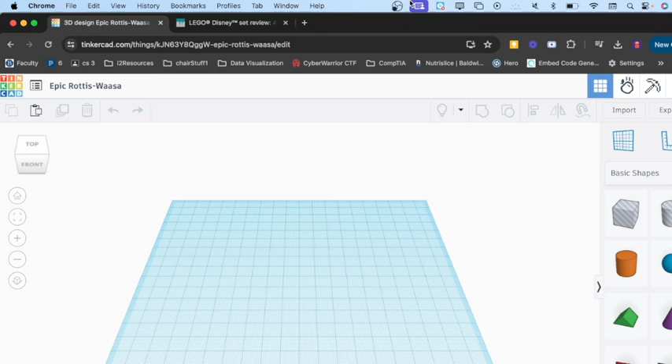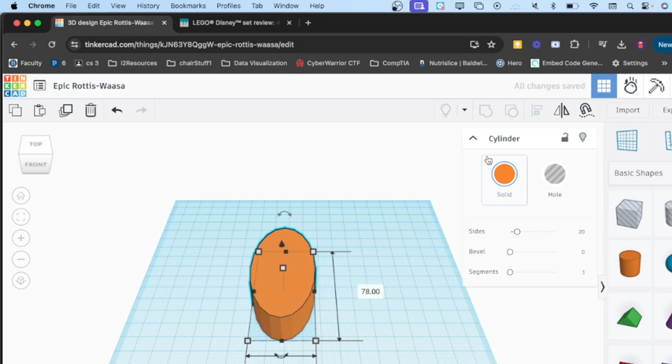I think the first thing we got to think about is the brush head. When I think of a brush, it's kind of like this shape. So we're going to start with something like this. We're going to scale it to be whatever - this is the thickness of the brush.

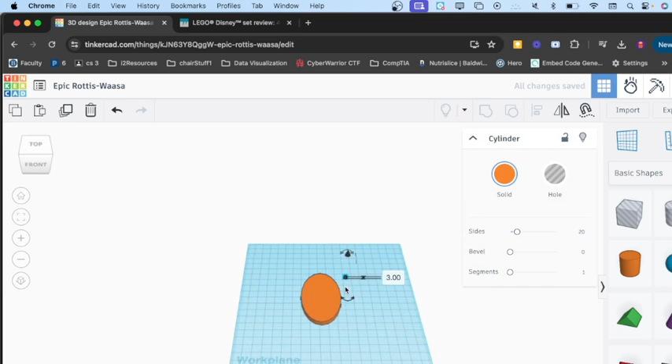And then we need to make some bristles. Now, the thing about the bristles, what I've learned, is that we're going to have to make them at least about 2 by 2 mil. You can see my settings are in millimeters down here. That's because if you go much smaller than that, even though real bristles are smaller, the printer has a tough time printing them. So we're going to make them like 15 - that's a centimeter and a half.

And we're going to move them onto this, which I think we made - what did we make it? 5. So we need this about 5 above. So right there it's at 0, and now we're at 5.

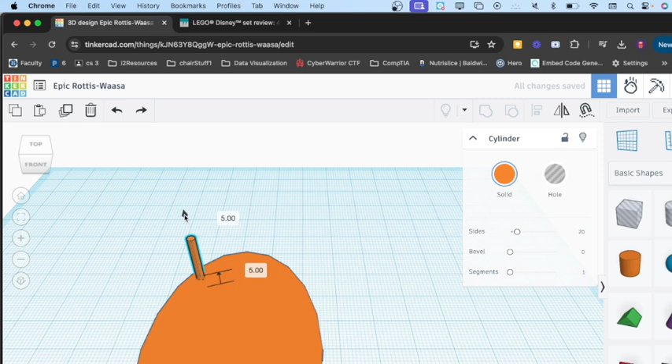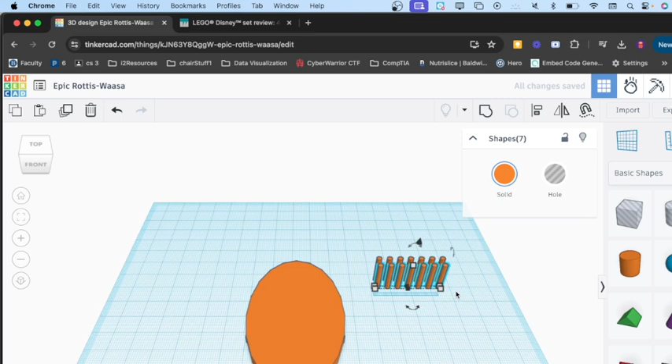So now what we can do is we can do a duplicate feature where we duplicate, move with the arrow keys, something like that. Duplicate. And what then we can do is take all these, duplicate, move. And if you wanted them to be kind of crisscross, you could move it over a little bit. I think this would actually do the trick. So now we have our bristles, and now we can just move them into position.

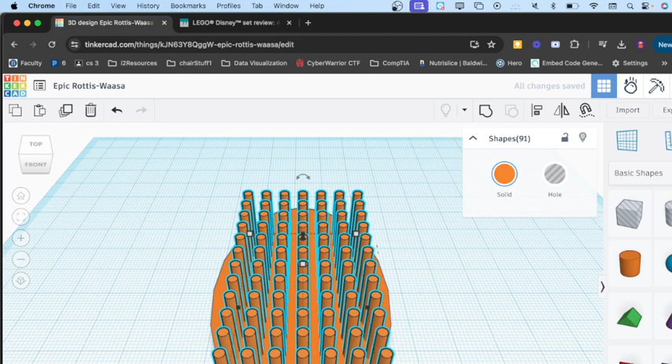Now, you would take a little bit more time on this so that you could make it - I'm looking at this 5, you want them to be connected. Now some of these we don't need, right? So we're gonna get rid of a few - that one and this one. Anything that's hanging over, we don't need.

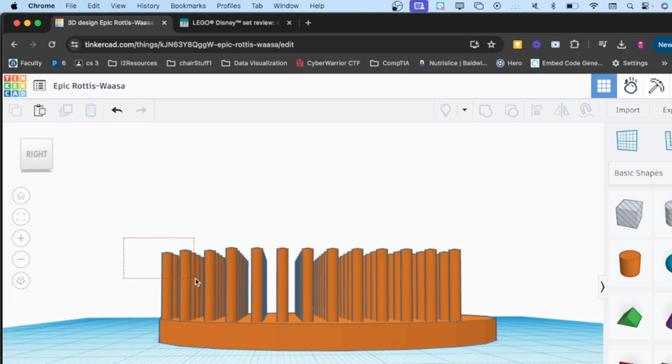Okay, turn it around - those are all good. Maybe we would put more here, just like we have here. So you can go in like this, select these few, and then Command D and duplicate, rotate, like so - that's a 180-degree rotation. Now we can move those into position so they're right in line with those. And now, yeah, you're covering most of the brush.

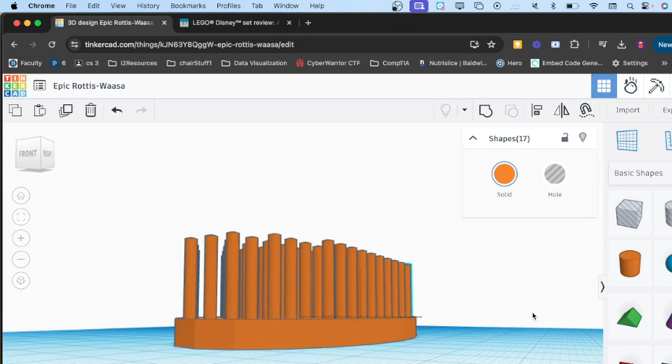Okay, great. The next thing we would need is that handle feature. So we can actually just group all this together, that button. And now we have one big shape. We'll just move it up here. And now we need that handle.

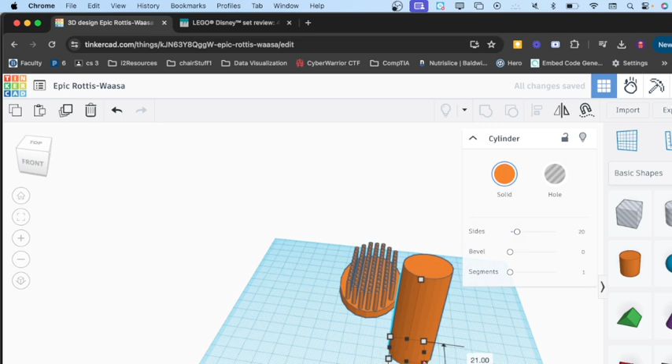So we were going to put something inside the handle, so the handle has to be a little bit big. Now this is 5 centimeters, which if you look at a measurement, that's really big. We're going to scale it down to like, I don't know, I think we could get away with like 25. So this is going to be our handle. And then what we can do is duplicate that, scale it down a little bit to maybe 20 or 21, and that would give us a 2 millimeter perimeter.

Make that a hole. Select both of these. Align that to the middle, like so. And move this up just a tad so it's not on the build plate. Since this is 2 centimeters, we want to raise it 2. And now we group that, and now we have a handle with a hole.

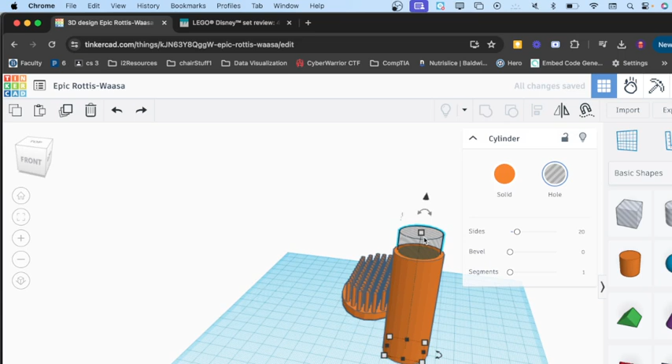Before we did that, what I would probably do is duplicate this, move that out, make that a solid. And what that's going to be is - I'm focusing in on these by clicking F, it's a little trick. So now I'm just going to scale this down by 1 for the tolerance. Okay, so I just moved it from this to this.

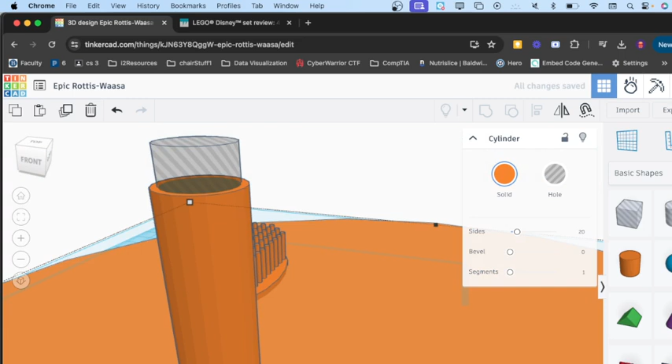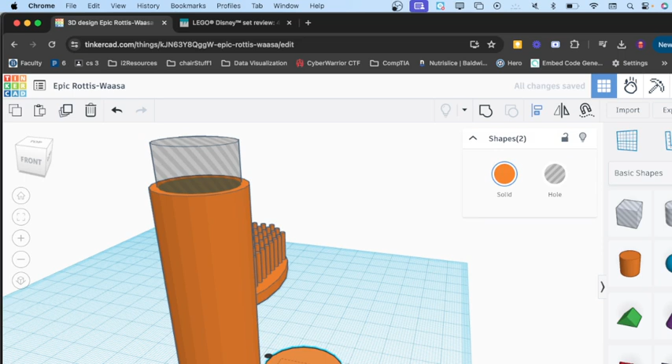And then I'm going to duplicate that, and we're going to scale it. Undo. We're just going to scale that up a little bit. And we're going to use that as the lid. Move it up, 2. Great. Select both of those, just like so. Align middle, align middle. And now you have that for the top.

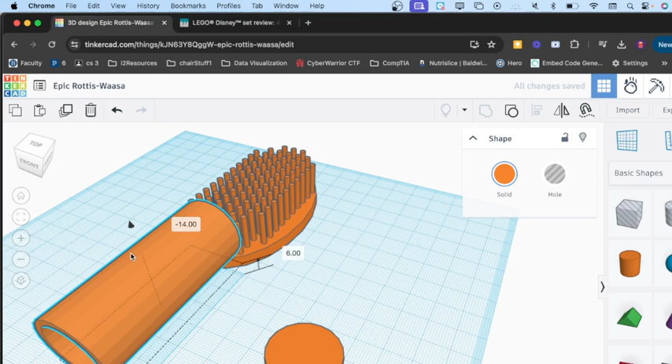Group that together. Group this together. And group that. Great, so now you have all the pieces pretty much. Obviously we would rotate this so that it is 90 there, and we would bring that over here somewhere, and we would get everything kind of set in place. Take these 2 items and align those to the middle.

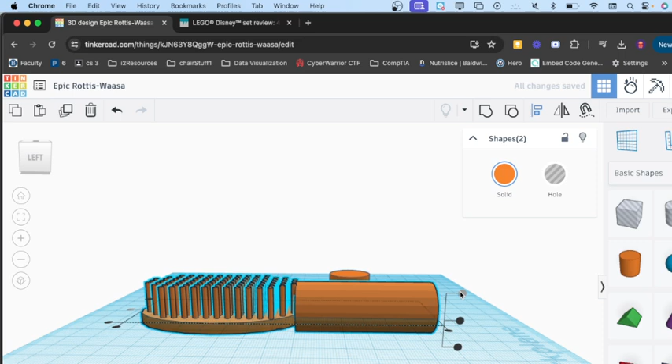And now we're getting somewhere - we're starting to see a brush, right, with a handle, all that jazz. Probably want to center align that. Maybe, I don't know, maybe not. Maybe we want it like this, or not. Maybe we just want this like down like that, something like that. I don't know, this is all up to you. But now we're starting to get the shapes and stuff like that.

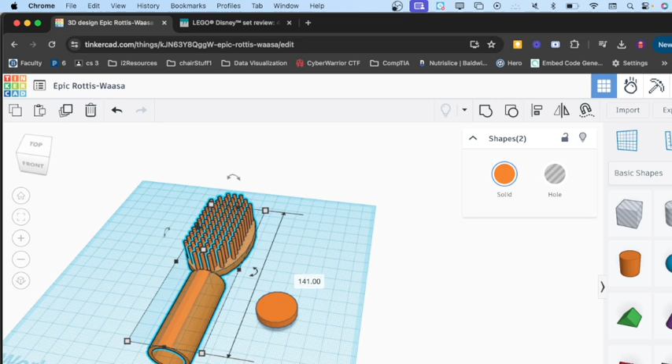Now you would add a toothbrush here and the other stuff. And if you wanted a mirror on here, I think I would just make like a flat surface - I think you were putting the mirror on the bottom of that. So I would maybe take that oval shape and make a second oval shape that's a hole and put that right in there, just so that you had like a little rim around it.

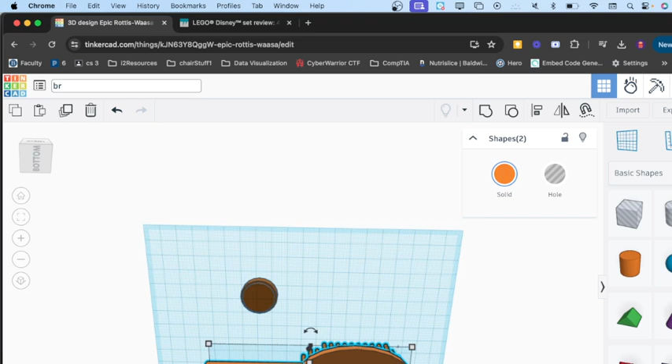So you would rename it brush thing, whatever you want. And that's the start of your project. Good luck.